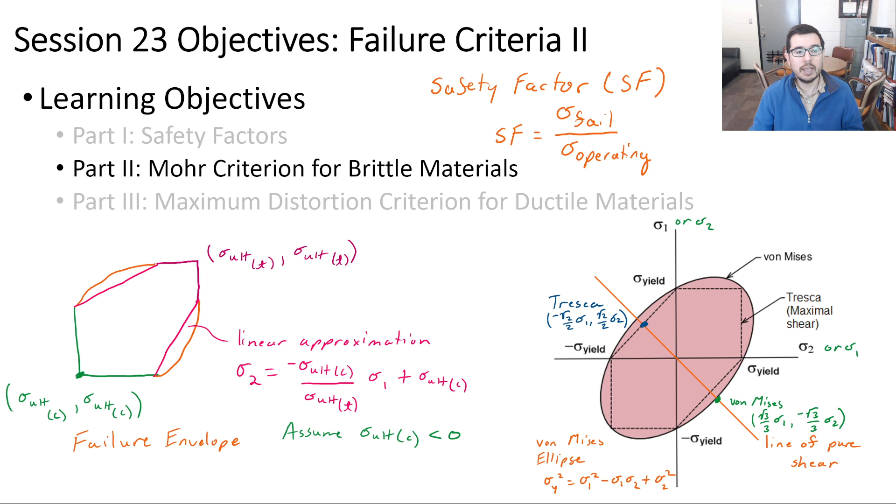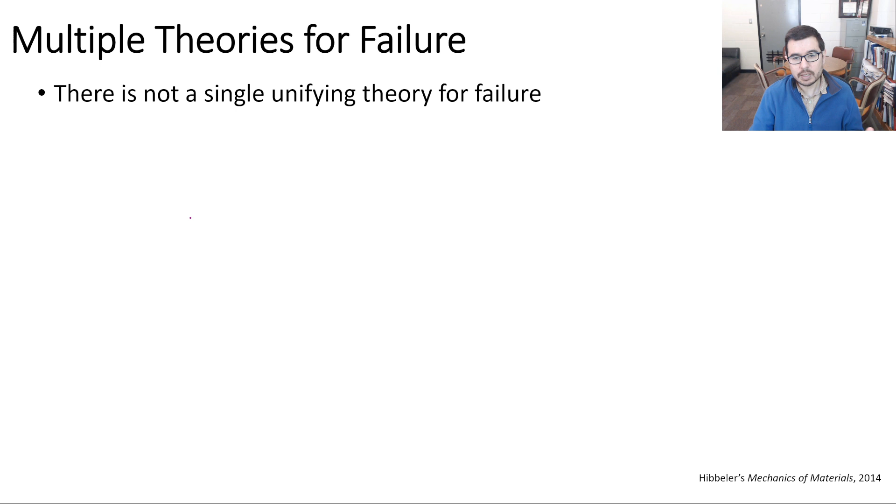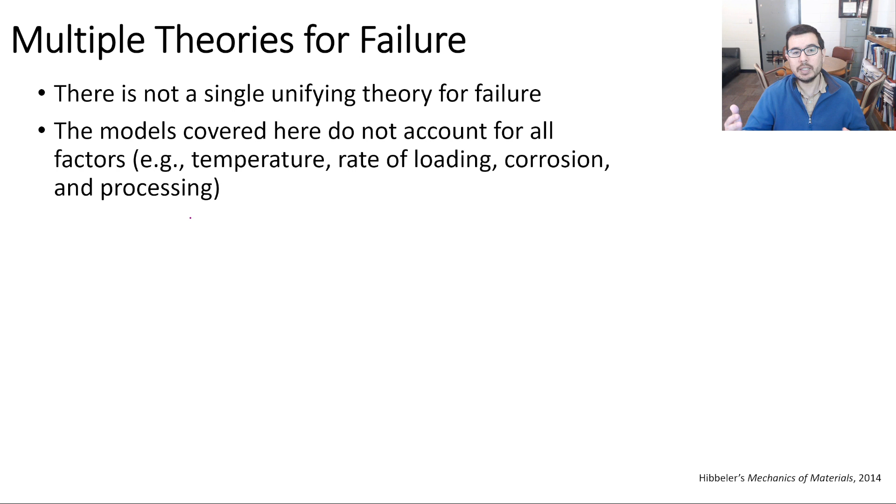Now, let's go back a little bit and review the ideas associated with theories of failure. One, there's not a single unifying theory for failure, and these models do not account for all factors: temperature, rate of loading, corrosion, processing, even variation in the type of mechanical loading that you might expect.

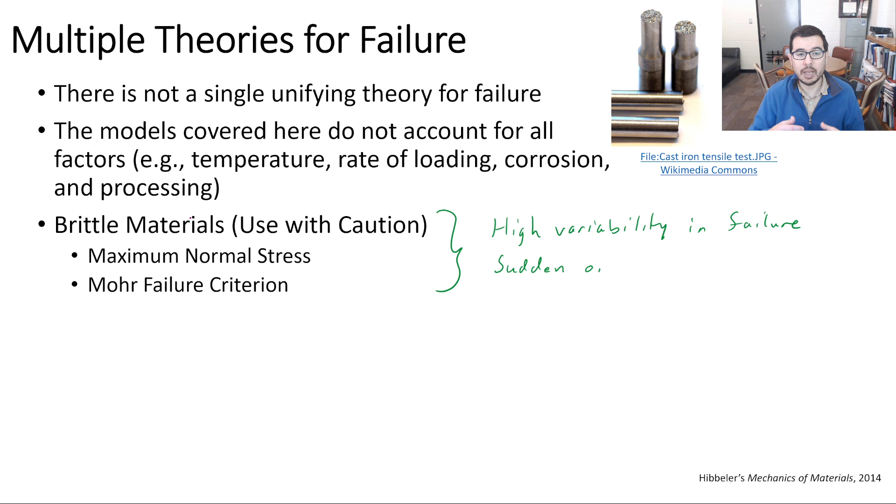We've discussed previously the maximum normal stress criterion for brittle materials, and we've also discussed how we need to use these with caution because there is high variability in the failure of these brittle materials. The failure can be sudden or catastrophic without much warning, essentially you're dealing with shattering or the breaking of glass.

Ductile materials are a little more forgiving and tend to be less variable in how they fail. The one we've discussed up to this point is the maximum shear stress, or Tresca criterion, and in the third part of today's session, we will discuss the maximum distortion energy criterion, also known by the name Hencky, or von Mises, or Huber, or Maxwell. A number of people were involved in the thoughts behind the maximum distortion energy, so their names are associated with it. Typically, when you're dealing with simulation packages, you're going to see von Mises.

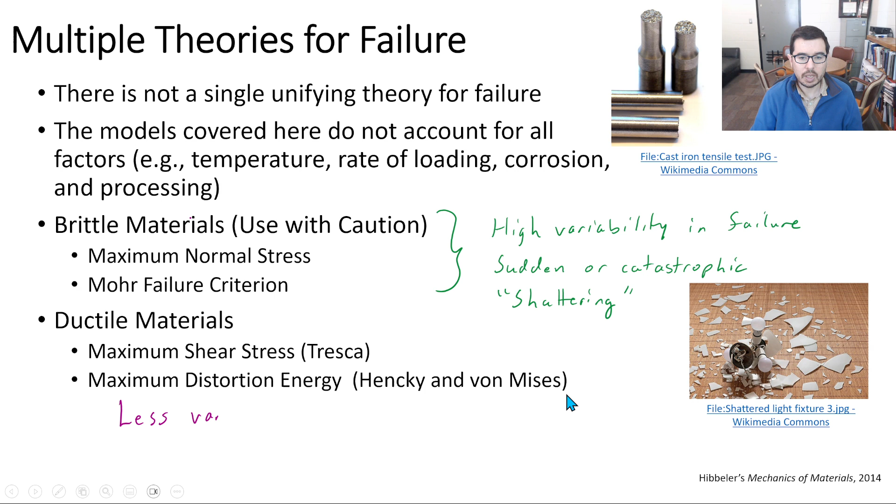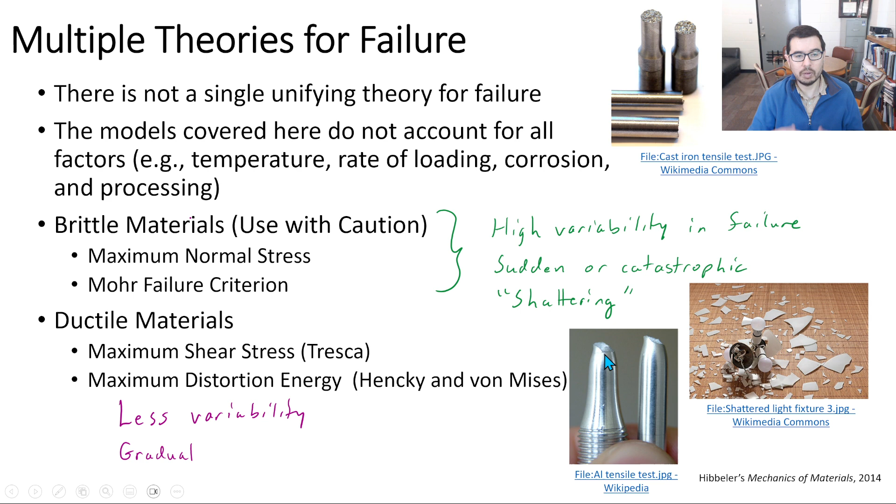So we discuss how there's generally less variability, and we have more of a gradual failure, and we can see that these materials may have some type of necking or elongation behavior at break.

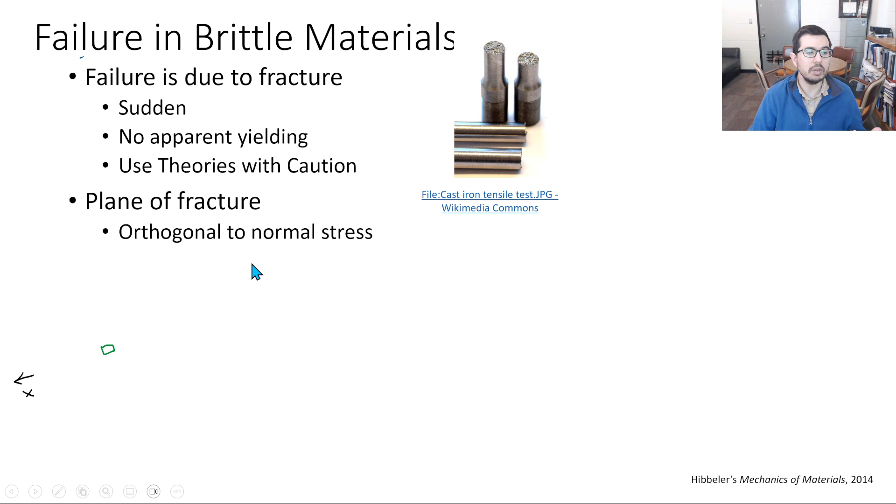Failure in brittle materials, again, can be sudden. There may not be apparent yielding. It can just catastrophically go. And we have also discussed how the plane of fracture is orthogonal or normal to the stress. So here we were pulling the material apart and it breaks, and the plane of fracture is orthogonal to the internal stress, the uniaxial load, and we consider what is happening with an equivalent sigma max, or an equivalent maximum normal stress, and we can say that is why it's going to fail.

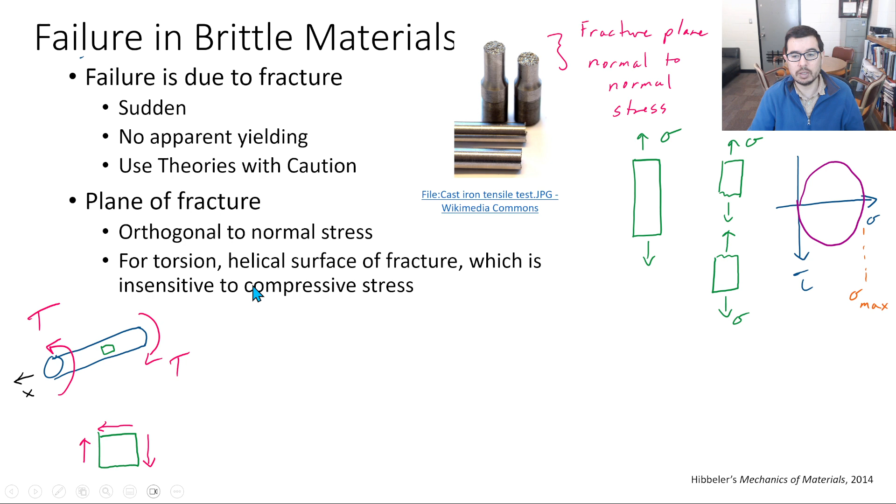So nothing's changing in terms of our thought process for brittle materials here. And we also discussed how we showed an example where we twisted a piece of chalk and we're able to get the kind of helical profile for the break.

And if you take a piece of chalk, I don't think I have one now. Oh, I think I don't know. I guess I returned it.

But if you take a piece of chalk and you also just break it like that, you're putting bending stress, not uniform bending stress across it, but bending stress across that thickness profile. At the neutral axis, the bending stress would be 0. But anyway, you can also get a very nice solid break because the fracture plane is orthogonal to the normal stress.

Okay, and so this slide is from session 22. If you like, you can go back and review what we discussed in a little bit more detail, a little bit more slowly, in terms of how we think about fracture happening orthogonal to this normal stress being applied.

Okay, so this was under pure shear, and now we're saying, look, there are going to be normal stresses when we rotate 45 degrees, and we are now at the point where we're saying there's going to be a fracture line. It's orthogonal to that normal stress. And since the ultimate tensile strength is lower than the compressive strength, we would expect fracture to happen when you have tension more so than in compression.

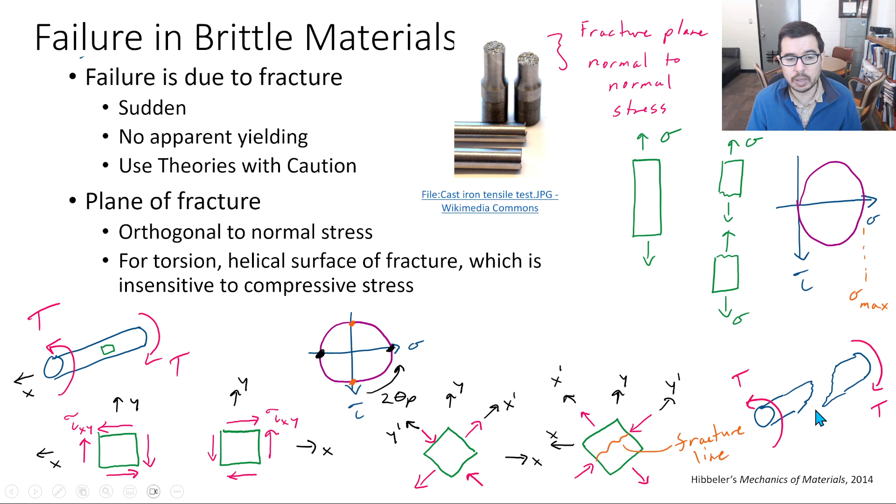Okay, so if you twist, what you have is we're now specifying that there's going to be a fracture line, and we're going to see that fracture line coming here at 45 degrees.

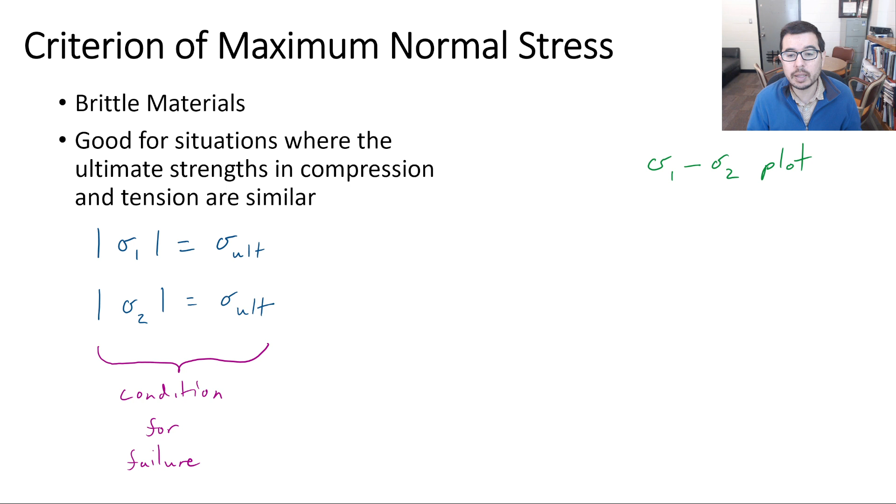So we discussed the maximum normal stress criterion in the past, and that was essentially saying look at sigma 1 and sigma 2, assume that the ultimate compressive strength and the ultimate tensile strength are the same, and if sigma 1 or sigma 2 are greater than this ultimate strength, then we have failure. We used the Mohr circle to look at the maximum normal stress, kind of the field goal method, between minus sigma ultimate and positive sigma ultimate. We also used the sigma 1, sigma 2 plot to map out the region or envelope in which we'd be safe, and failure occurs outside the box.

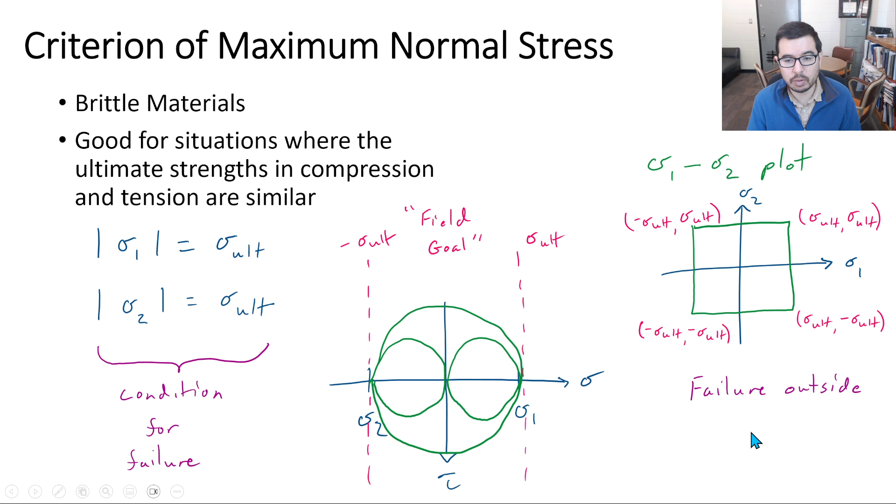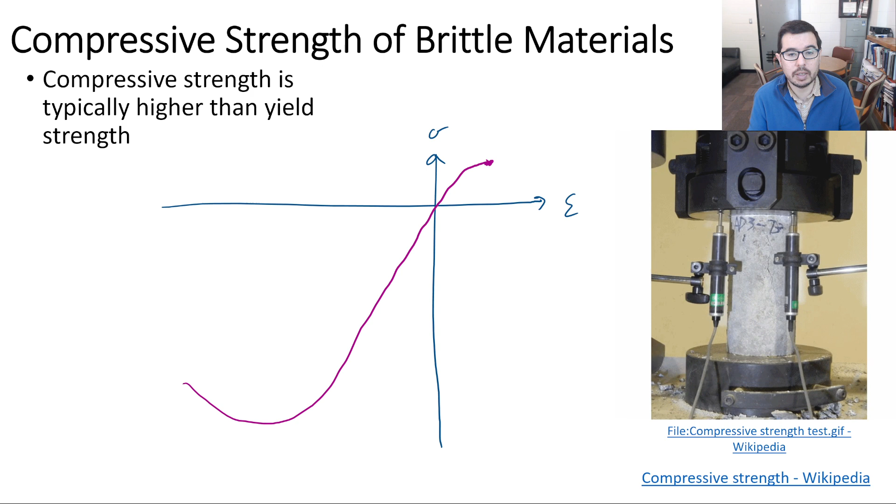Now, we've also discussed that the compressive strength of brittle materials is typically higher than the yield strength. The maximum normal stress theory is not bad, but it assumes that the ultimate tensile strength and the ultimate compressive strength were the same. So Mohr's failure criterion says, look, we know that many brittle materials have a different tensile strength than ultimate compressive strength. There's a difference between the ultimate tensile strength and the ultimate compressive strength.

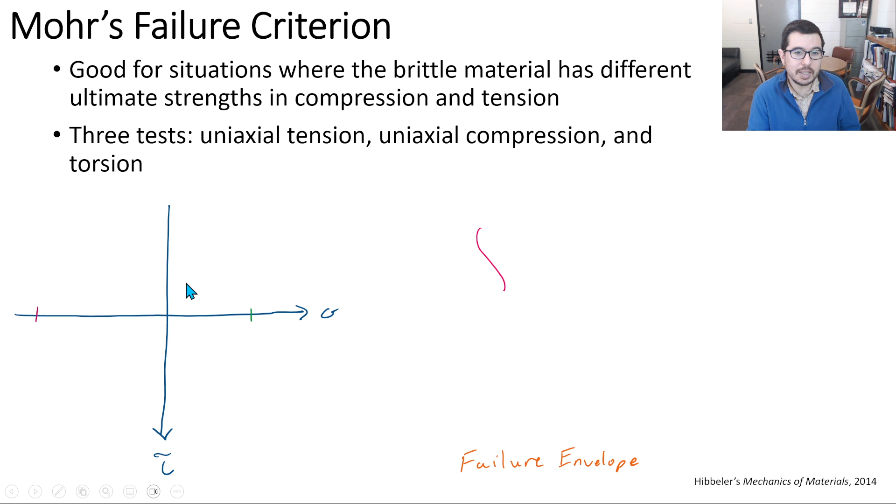Let's look at how we might account for this. We're not going to go into too much detail, but you might, or others have, looked at three ways of testing the material. One is looking at how it fails in tension, and so we might draw a Mohr circle like that, going in the positive direction on the stress-strain curve.

We can look at what happens in compression, and when we do that, we have a larger Mohr circle. Typically, brittle materials are able to handle more compressive loading, more compressive stress, so the Mohr circle ends up being bigger in that direction.

And then we can look at what happens in torsion. There's a Mohr circle there too, and we're seeing that there's kind of this maximum shear stress, this ultimate shear stress, associated with it.

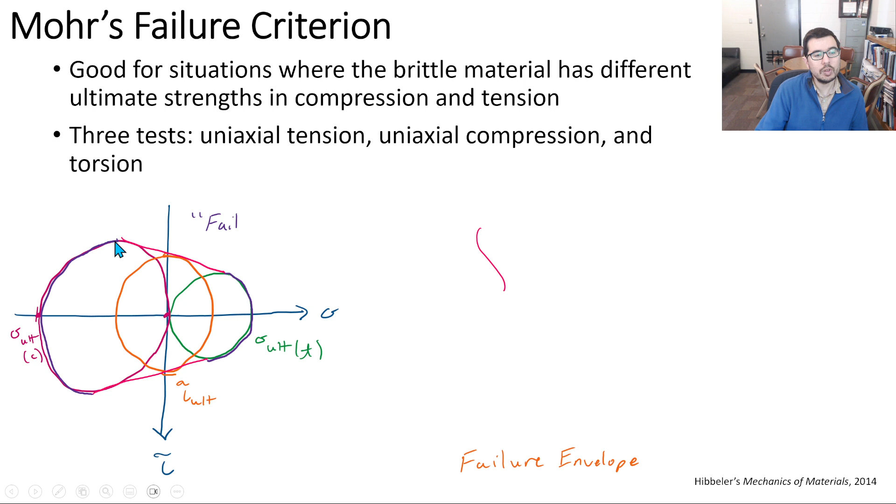Then you do this interesting slick thing, and you say, okay, to not fail, we've got to be inside of these Mohr circles. That makes some sense, right? Because we're saying the maximum normal stress is what we're concerned with, so then we can actually put this tangent line to these circles and call this a failure envelope. We're not going to get into all the details, but that's the basic idea.

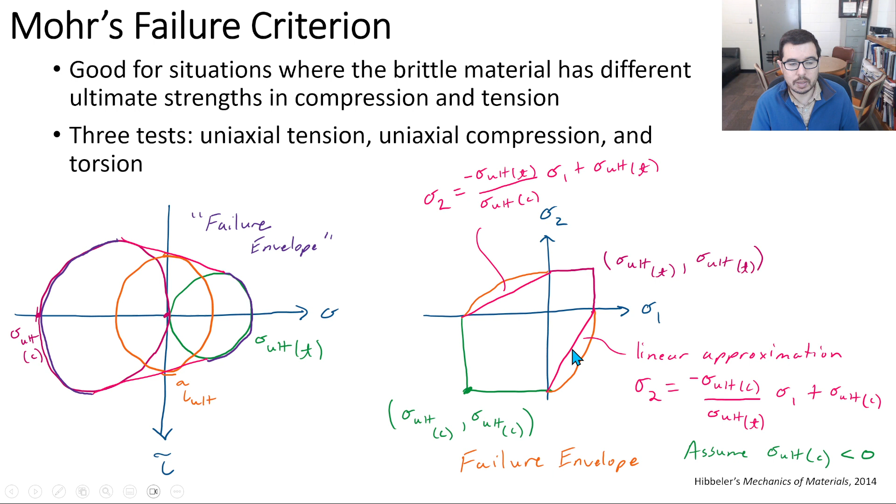What does this mean? It means we want to determine whether you're inside that line or outside that line. That's like a greater-than-equal problem, an algebra thing where you do these inequalities, draw a line, and ask am I less than or greater than. So we can evaluate a sigma 1 and figure out what sigma 2 would be if it's on that line, and whether we're above or below determines whether we're within the envelope of failure.

Here we have an example. We'll say we have a brittle material and a depicted state of stress. In this case, we're going to do two sub-examples, and we want to know whether or not we anticipate failure according to Mohr's criterion.

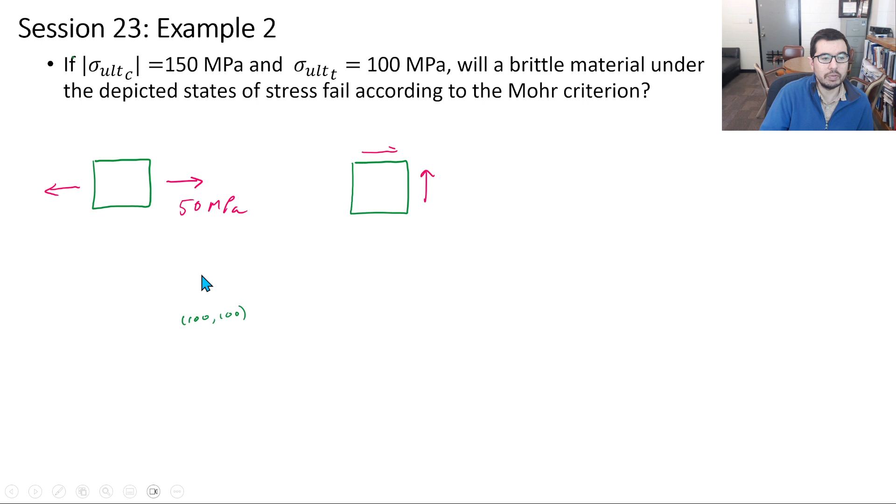So here's a similar one: uniaxial, 50 megapascals. Here's another one: pure shear, 30 megapascals. If we look at the Mohr circle for this case, it's familiar. It looks like sigma 1 equals 30 megapascals.

All right, let's go over here though. We have sigma 1 equal to 50 megapascals, sigma 2 equal to 0, sigma 3 equal to 0. If we plot our sigma 1, sigma 2 plot for Mohr criterion, what we get is something that looks like this, using linear approximations here.

This is 0, 100 over here. Where is our sigma 1? Where's our sigma 2? Well, sigma 1 is 50, sigma 2 and sigma 3 are both 0. So that puts me right here, at 50, comma 0. So we expect that we will not have failure because we're within the envelope.

If we want to estimate how safe we are, we could think of a safety factor times sigma 1 has to be less than this sigma ultimate in tension. This might be a little counterintuitive, but sometimes you can think of these safety factors as multipliers. So how much do I have to multiply sigma 1 to get it to move to the right and be greater than or equal to my ultimate tensile strength?

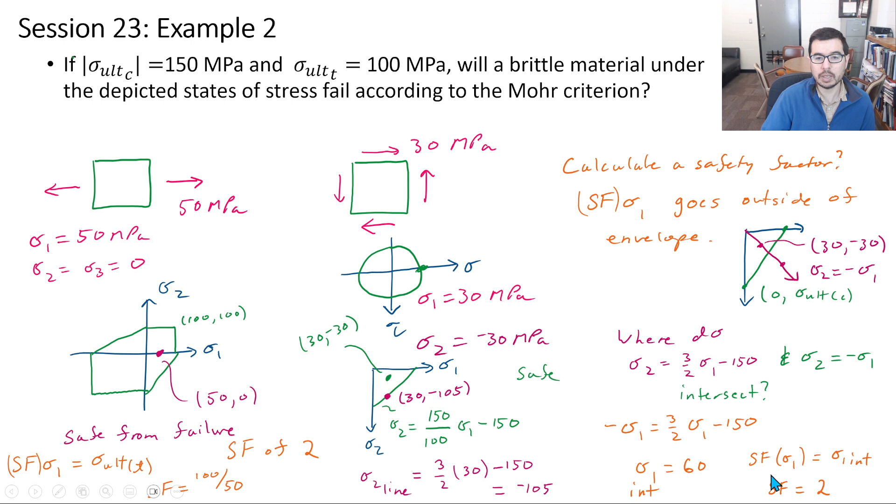So what is our safety factor? Once again, our safety factor is going to be equal to 2. We can do our sigma 1 intercept divided by our sigma 1, which is 30. So this is 60 divided by 30, which is equal to 2.